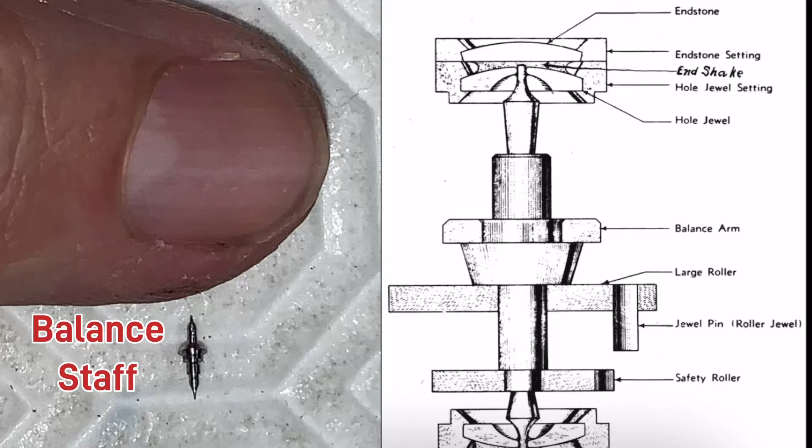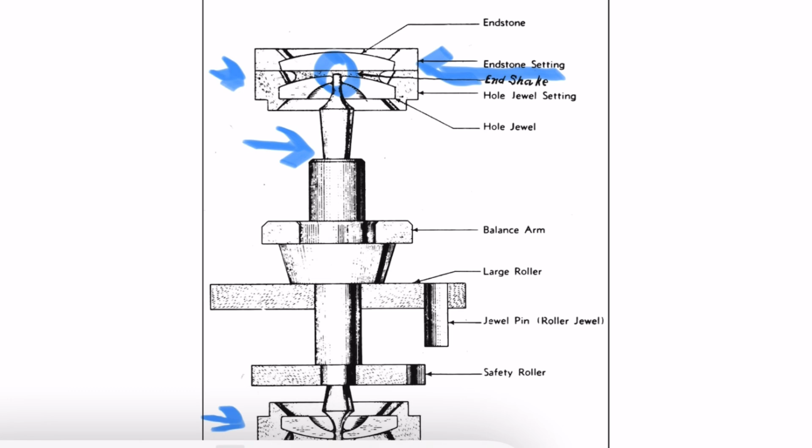This is a balance staff for a pocket watch, and these are the upper and lower jewel settings. This is where the balance cock would rest. In the pocket watch I've made, all the parts have not been fitted on. But what I need to do is make sure the balance staff length is absolutely perfect to fit into the jewel holes here.

I do have the roller table, but I have not fitted it on. This is the roller table right here. When I push this roller table up, there's going to be a little bit of a gap because it's only going to go to here, and that little gap will lower the jewel.

What I want to do is trial fit the roller table, assume the gap, and determine where the pallet fork hits. The pallet fork will be like this, and then it'll have a safety dart that goes out like that. This roller table has a double roller safety on the bottom here, and this dart, or guard pin, has got to merge perfectly with the little small bottom part of this roller table.

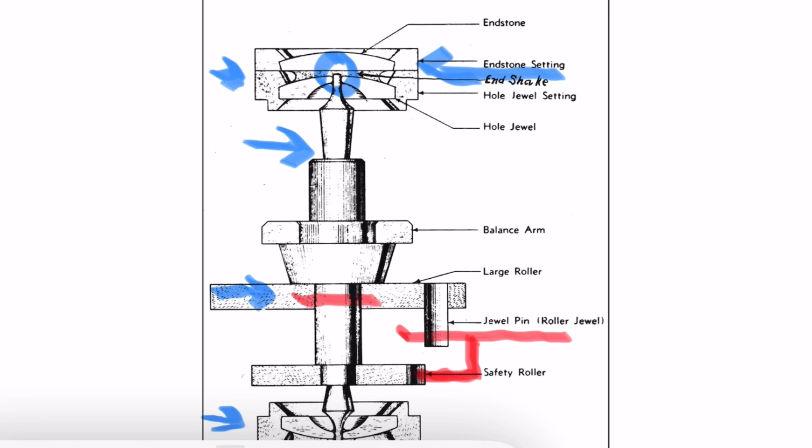So I'll fit that to see what I want, to see whether I have to remove material from the bottom pivot or upper pivot. If I remove material from the upper pivot and everything down here is fine, no issue. If I remove it from the bottom pivot, this jewel lowers too much, the roller table would lower, and the jewel could hit the bottom of the dart, which would make the whole system not operate.

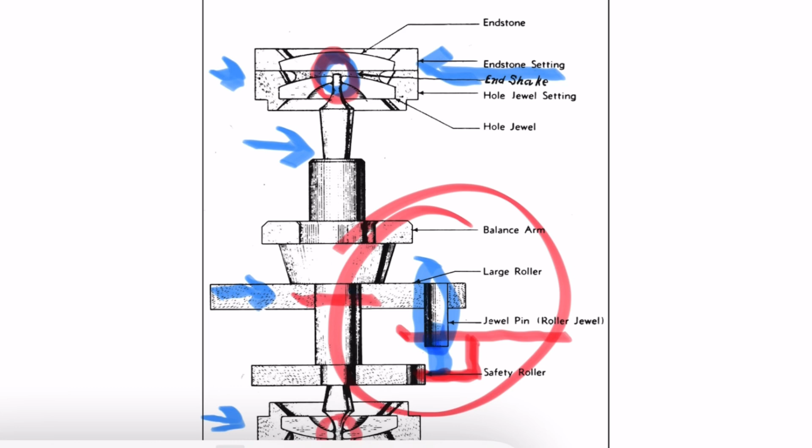So here's a picture of the complete balance staff, balance, and the balance cock on the top here. Let me just have a look at this here. This is the balance cock on the top, and this is the balance right there.

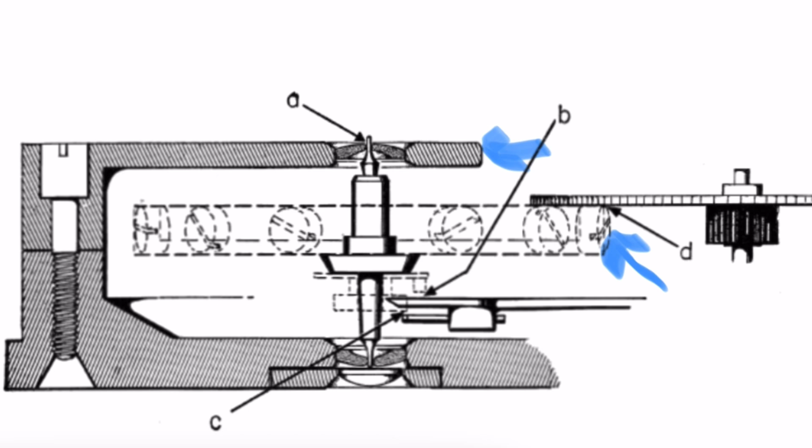The system I'm trying to make sure is correct is right down here, and I want to make sure that's absolutely accurate. So right here where it says B, that's where the merge is between the pallet fork and the roller table. That merge has to be absolutely perfect, the marrying of the two.

The issue I may have is that I cannot punch the roller table on all the way up at this point, because I have to probably remove material from both the bottom and the top of the balance staff. And if I have to do that, then I likely can't access the bottom to trim it down. I'll have to check. So what I have to do is trial fit.

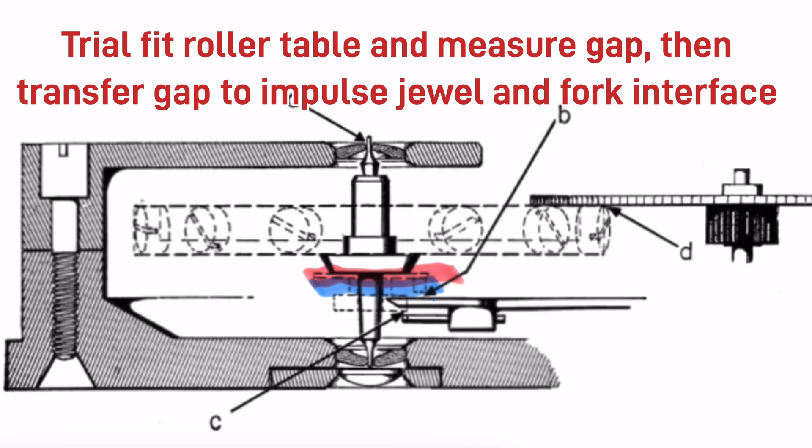I have to trial fit the roller table on, and there's going to be a gap. Let me just show you what I mean: this will go up only to a certain point, like there, and this will leave a gap right here, and that gap will effectively lower the roller table. So I can't actually trial fit the roller table with that gap on there.

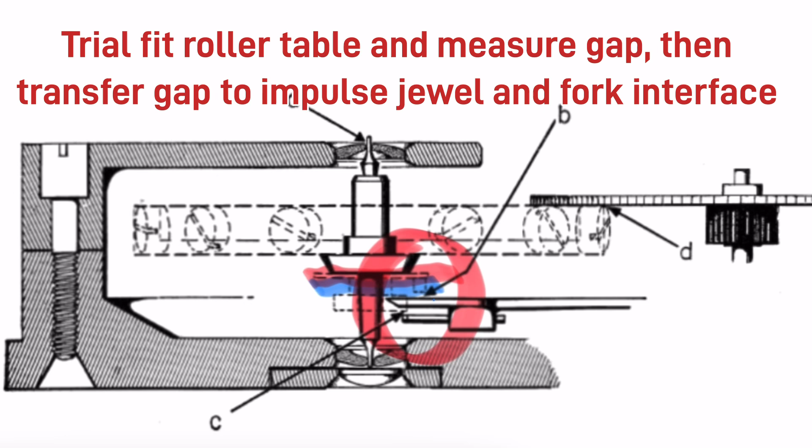I can assume the gap, I can measure the gap, I can put the roller table next to it but not on it, or I can see how much real estate I have on the bottom of the balance staff to allow me to move it up, allow me to trim it back.

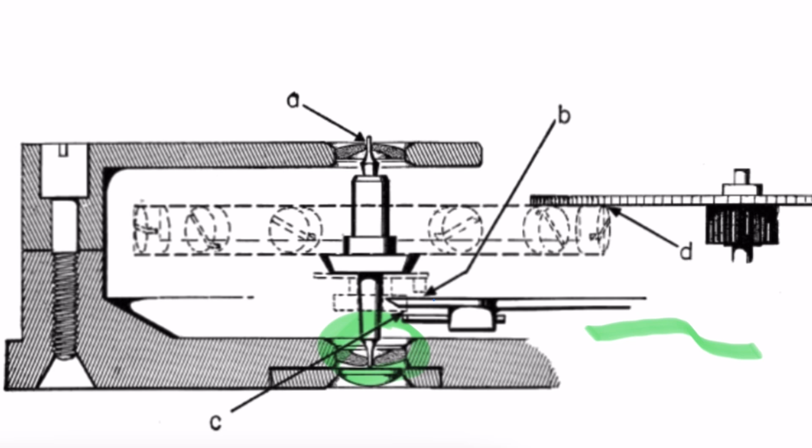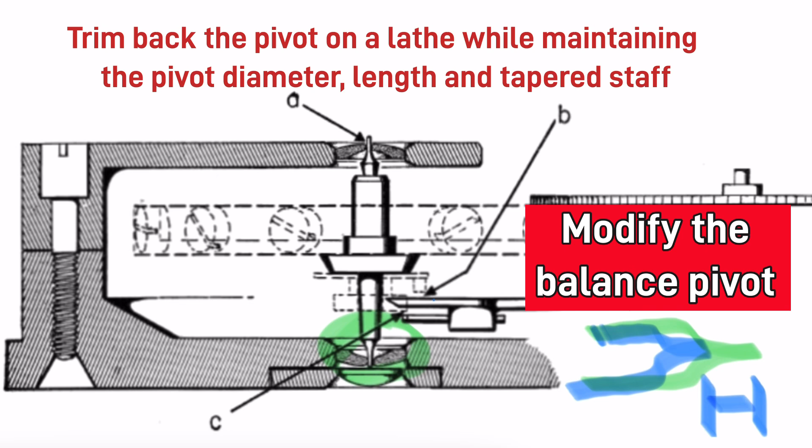I'd want to take the balance staff that's here and trim it back a little bit, so it would go from being a balance staff that looks like this, to a balance staff that looks like this, and I'd have to trim it back by this amount right here. So that's very tricky.

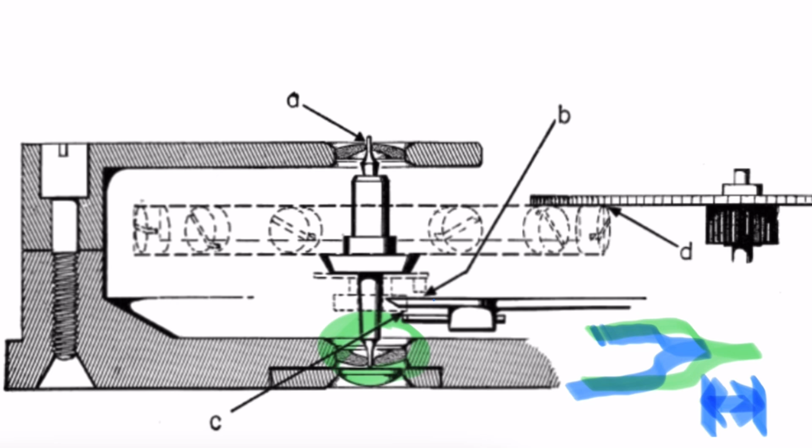So likely that's my next job, is to actually see whether this whole system here fits, actually works with that roller table, the pallet fork, and the guard pin.

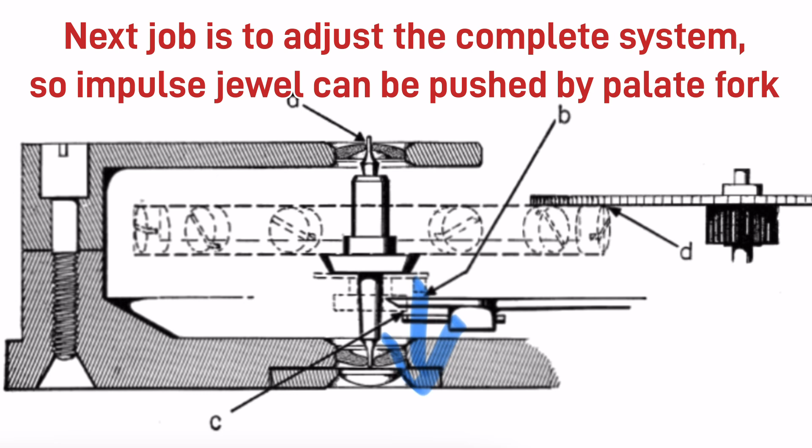The critical part too is that you don't want the impulse jewel that's here to be too low when it drops down in this direction. If it's too low, the impulse jewel won't interact with the pallet fork properly, and you've got a problem. The other thing is that the guard pin right here won't touch the safety roller, and then you've got another problem.

So I welcome all comments on how to do this trial fit.

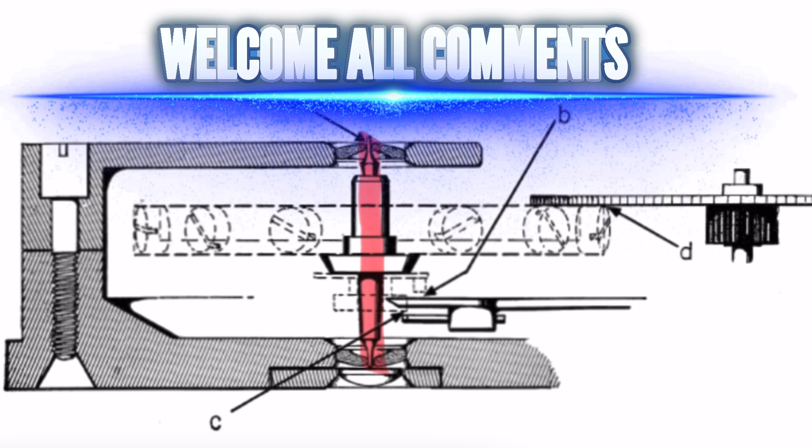I want to make sure this is absolutely perfect length, that it goes through the jewel holes, and that the tips of the pivot are touching the end stones here. If they're not touching the end stones, the cone part of the balance staff will be touching the jewel, and that'll slow it down. So you want the tips to be touching the end stones, or the cap jewel, to make sure it's perfectly fit.

So I have no issue trial fitting the balance, because it's going to be riveted on later, and I can take it off without a big problem. It's sort of snugged on right now, but it's not tight, so I can put that on.

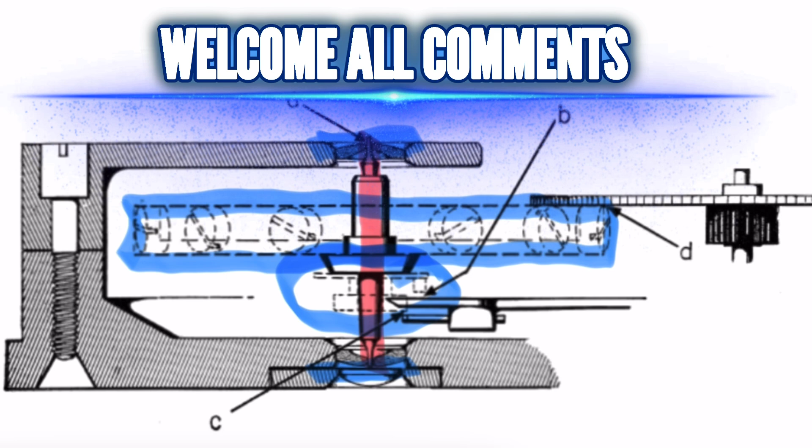But again, my problem is, how do I do this without putting the roller table on? All suggestions are welcome, I'll ask for help.